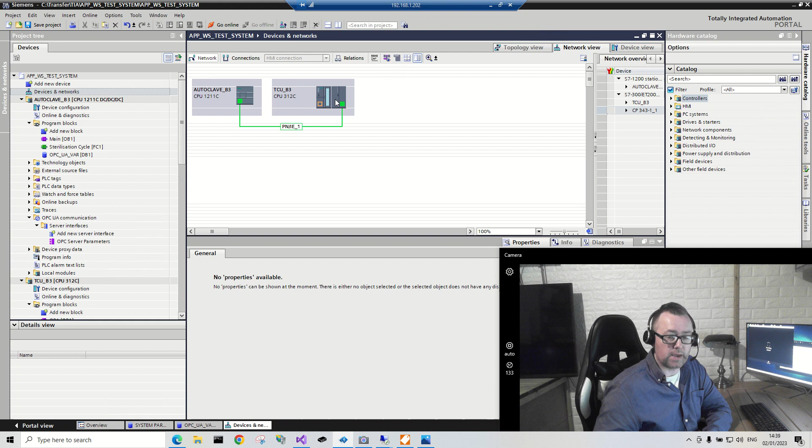The purpose of this video is to run through a comparison of basically Ethernet communication on older Siemens PLCs like an S7300, and then compare it to the OPC UA enabled Siemens PLCs such as the 1200 and the 1500, and just basically point out security issues that exist, and the real advantage of using OPC UA and going down that road.

So what I'll do is I'll open up a project where I'm looking at the S7300 and then look at the options around Ethernet communications in the 1200. So in a 300, I'll just click into this 300 here. Most of the 300s that I would have seen either had this inbuilt Ethernet port if the CPU was within a certain range, or there would be an additional Ethernet card on the side.

And essentially, this Ethernet card basically used something called put-get to allow communications on the outside. So the Ethernet card effectively allowed, say, a data historian or some kind of SCADA system to read values and poll back values intermittently. And if I go in, for example, to the card itself, what you'll see here is a description. You'll see send, receive, fetch, write, and put, get, etc. Those were the methods that were there.

The problem always with these methods and with those cards in the more modern age is that people would actually be able to write an application to force a value to be something, and especially if someone wrote some kind of malware and they knew what they were doing, they would be able to actually go and create problems effectively with the PLC.

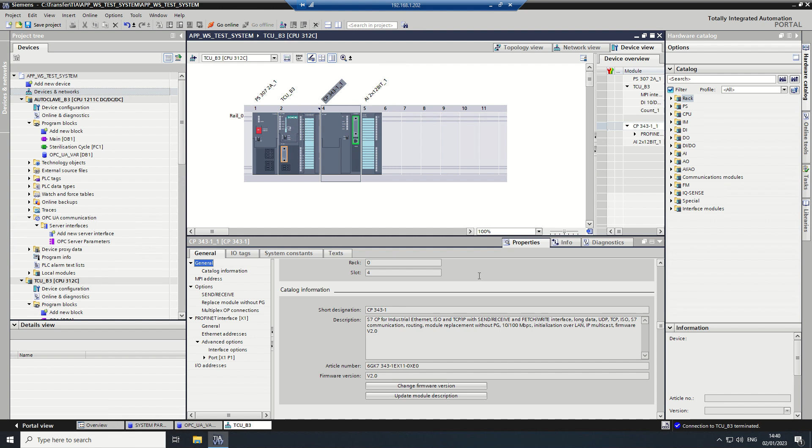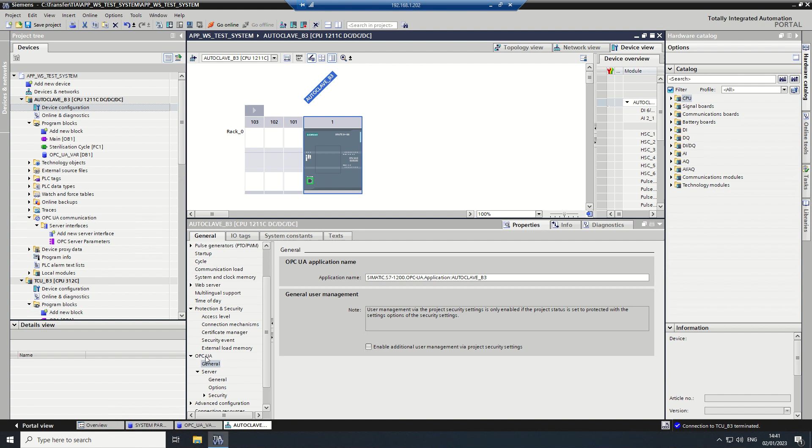So if we go then, for example, to the more modern PLC, which is the 1200, you'll see that there's options within TIA which aren't there for the older Siemens PLCs, and in particular, it's OPC UA. So OPC UA essentially is something that you can select, and then you can say, look, we have a port, and then in the security section, you're able to actually encrypt the actual communication.

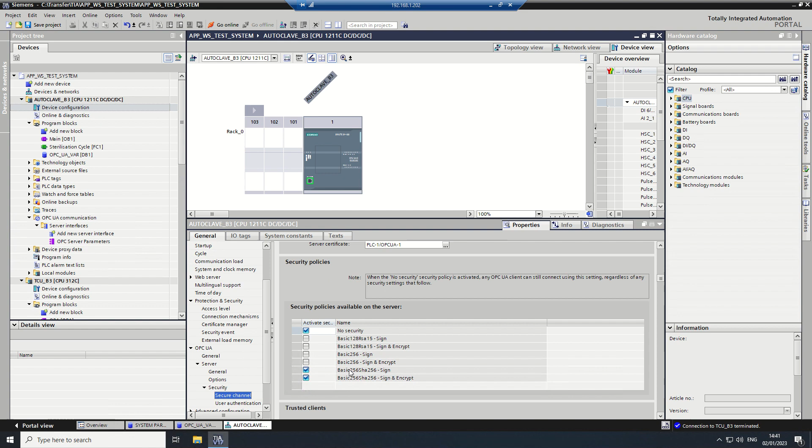So the communication for the S7300 was open; it would be able to be read by another program. But here, the actual packets as they go over the network are encrypted. And then the more important thing here is that you're actually able to have users where, if you want to do something, you have to supply a username and a password. And then you get into areas where you have to supply certificates and so on.

So security that would have been very much a norm for someone who was doing some form of website on a web server has now been brought forward into the PLC world. Okay, so where I see this being practical in a manufacturing sense, I will open up an architecture here.

And what would be very normal is that, for example, here you have a whole series of Siemens PLCs, and the Siemens PLCs are out in the field. You've got a number of pieces of equipment. And here, for example, you have this OPC server. And if you go into the OPC server, I'll just do something very simple as an example. I'll show that I have a copy of Kepware, and Kepware is pointing down to a particular PLC, and it happens to match the one that I was looking at previously.

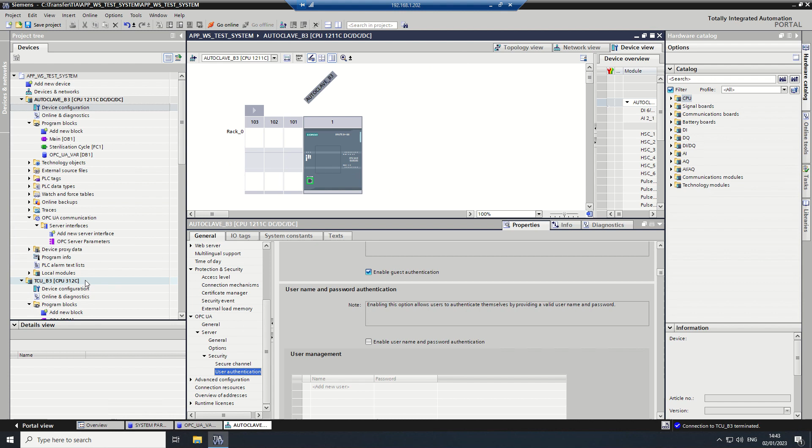So if I say, for example, if I go in here to this particular PLC, and if I just go down, and if I just open up a particular data block, which is here just as an example, here I'll just see that there's a number of parameters for this temperature control unit. And if I go back then to the, sorry, I'll go back to the OPC server. That's what I meant to do.

If I go in here and I just take a look at this Kepware installation, you'll see Siemens TCP/IP Ethernet, and that is effectively using the old method, right? It means that Kepware itself is going down to take a look at the PLC, but using the open method. And you can come in here and, unfortunately, you can actually modify values. So I'll give an example of that.

Let's just say I go in here to the quick client, right? And I open this guy up here and say I have a target temperature. Now here's a kind of a custom application. So I'll just bring him down there. Sorry, 2 seconds there. So here's a kind of a custom application. And here I can see that there's a value of 60, and this application happens to work off kind of put get. So if I want to change the value here to say 51, if I go write value,

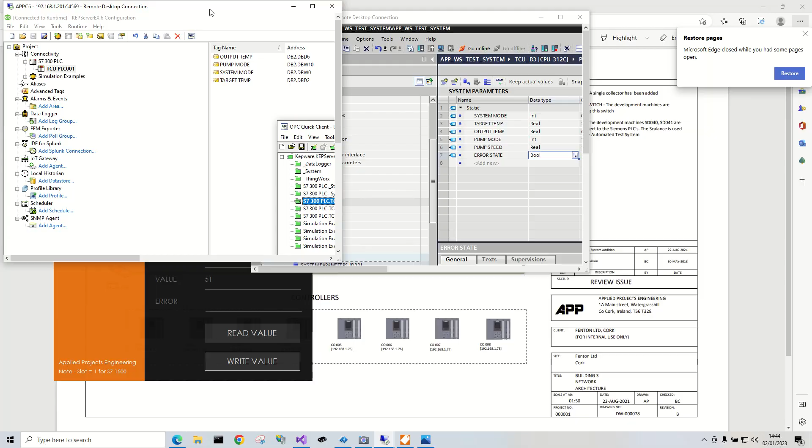then I will see in the OPC server that the value that I've written in has just gone through. And that came from an application that was external to Kepware and external to the PLC. So that means that you have the basis of actually being able to disrupt values and intent, in terms of like recipe parameters and so on.

So effectively, it means that when you're actually setting up values and you're going to reach down to a particular PLC, in the past, you would go into the channel and you would effectively select from the drivers which are here. But realistically, in the modern age, if you're going to have a middleware application such as Kepware, you should go down for something like the OPC UA client. And then you would effectively say, in this case here, maybe S7 1200. You would go in and then you would literally reach out to your particular PLC.

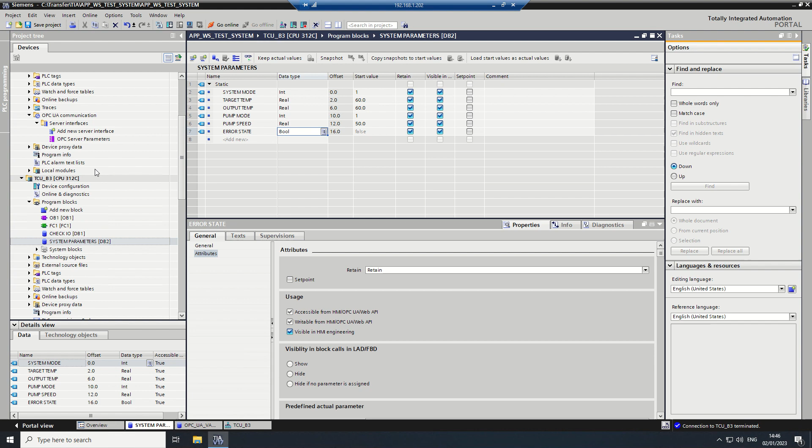Okay, so, for example, if I go up to the actual PLC itself, and if I go down to OPC UA here, I would literally match up the settings and the actual port numbers which are there, and you can effectively still have Kepware as your middleware application. But the problem primarily comes down to here. It comes down to the OPC server down to the PLC, not the third-party applications like the Historian coming in to talk to the OPC server.

Because where this can become very confusing is where you are here, and you can focus very much on Kepware. If I go down to Kepware here, and if you focus in on the OPC UA configuration, you can look at the OPC UA configuration from the Kepware side. But realistically, you should be looking at it from the PLC side, because that's where the problem primarily exists. You can also then get your application to go directly out to the PLC, which is something that I'll set up on another video.

So it should really be a focus for people to look at the communications from here down to here, not just simply from, say, some kind of SCADA system to here and the Historian system over to here also.